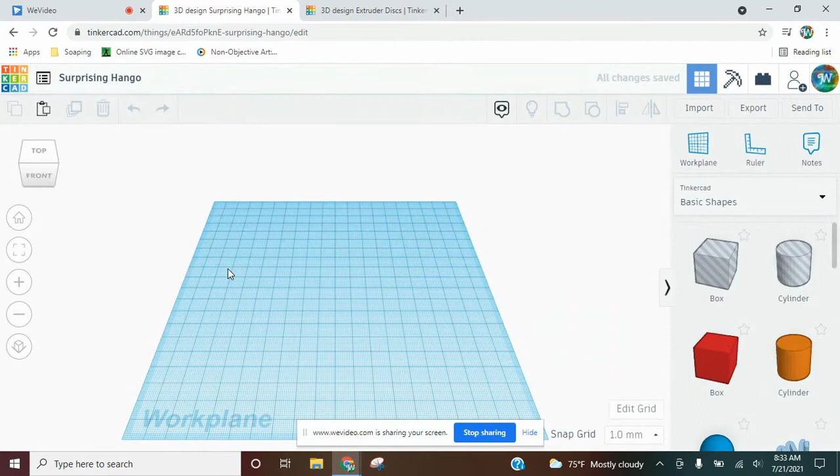A disk is basically a really flat cylinder. So I'm going to click and drag the cylinder over here.

My extruder discs are 18 millimeters in diameter, so I'm going to click and change this to 18.

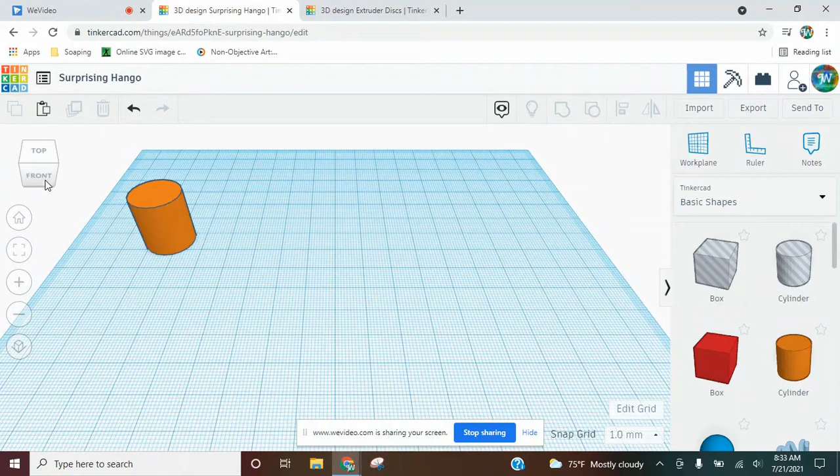I use PETG filament, which seems to be a little bit sturdier than PLA. I don't know if you use PLA if you need to make it a little bit thicker, but my thickness, I know 3 millimeters has been sufficient. So I'm going to change the height to 3.

And then while I've got this pulled up, I'm going to create more sides on it, and it's going to make it just a little bit smoother.

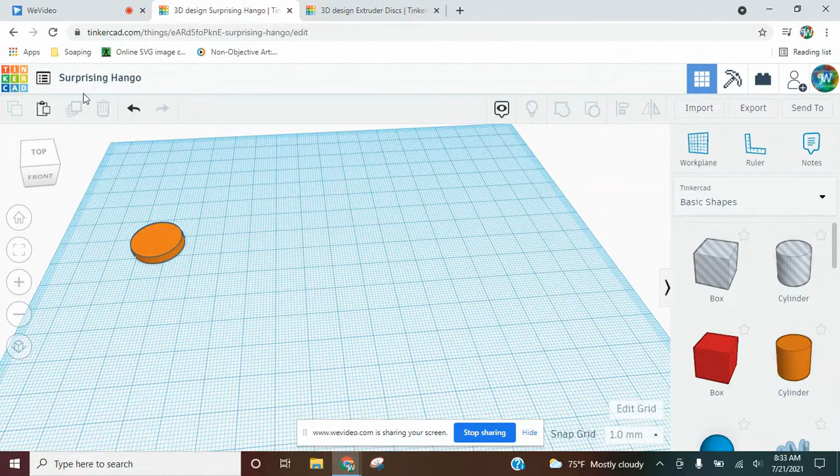Now we need a design, and because Tinkercad gives it these really interesting names, I have a hard time remembering what's what. So I'm going to click here and just change this to extruder disk.

All right, so now that I've got my shape, my extruder disk template, what I need to do is put a hole in here of some shape.

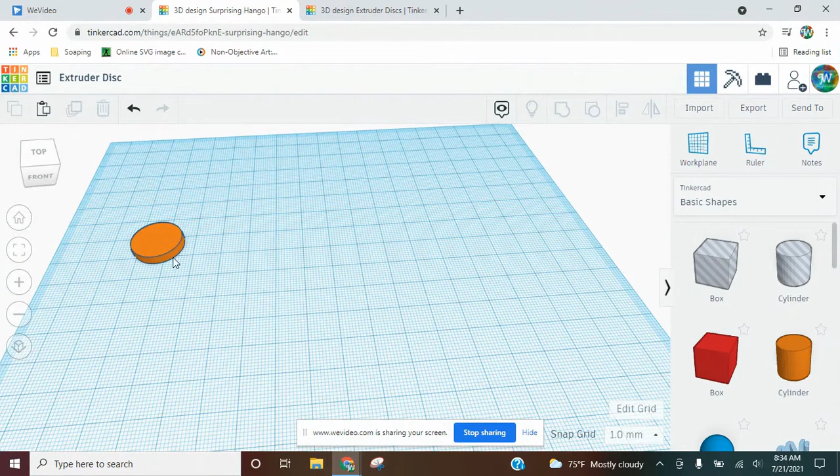Whatever image you decide that you want to put into your extruder disk, you need to make sure you're not violating copyright laws. I don't have tons of information on when it's okay to use what, but I'm going to go pick an icon or picture that I know is going to be okay to use with this.

All right, so what we want is a solid image that we can put into the disk. So my first instinct was to open this with Paint and just fill in the circle.

So when I go here to Paint and I click the paint bucket to fill in the circle, I can see I still have that white outline, which the file is going to pick up, potentially. Sometimes when you convert it, it would make it solid, but I don't know if it's going to.

So I'm going to fix that now. I can choose a shape and just go around it, then change the fill to solid. Then I can fill that in completely.

All right, so I got that done. Let's save it. And my save as options are not going to put it in a format where I can open it in Tinkercad. I have to have an object or STL, I think. I can't remember all of them, but none of these were options to open in Tinkercad.

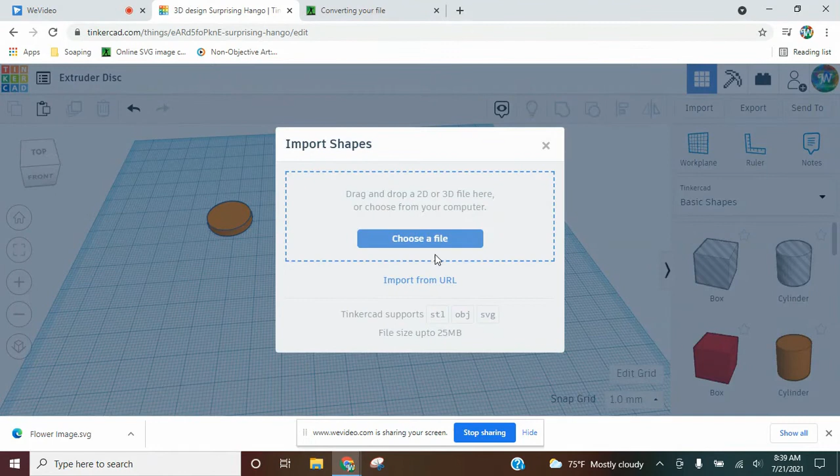All right, so I've got my SVG downloaded, and I can go to Tinkercad and import an image. So if I go to my downloads...

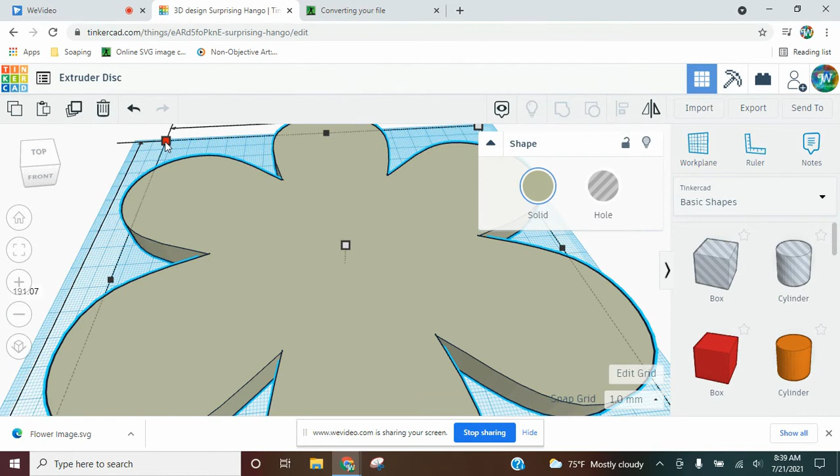When you scale this image down, we want the ratio of the side lengths to stay the same. So we're going to press and hold the Shift key and the corner to make sure that happens, and it preserves the ratio of the side lengths.

If I don't click the Shift key, I can do this and change the ratio of the length and width, but I don't want to do that. So hold the Shift key, hold the corner, click and drag, and now it's going to keep the ratio the same.

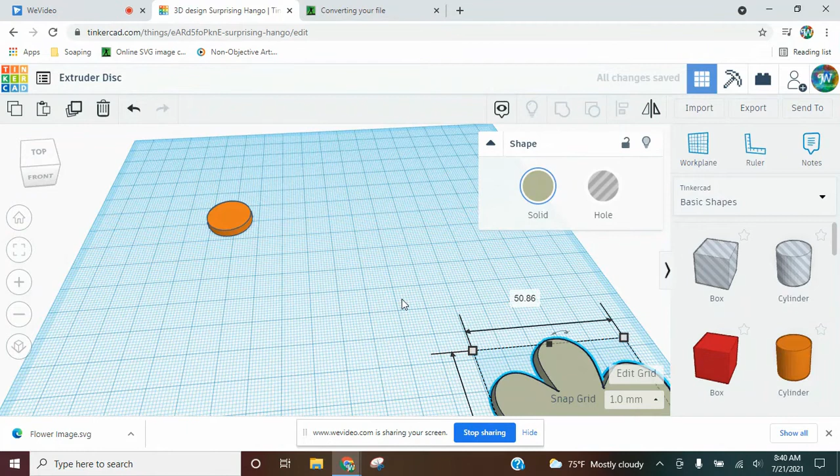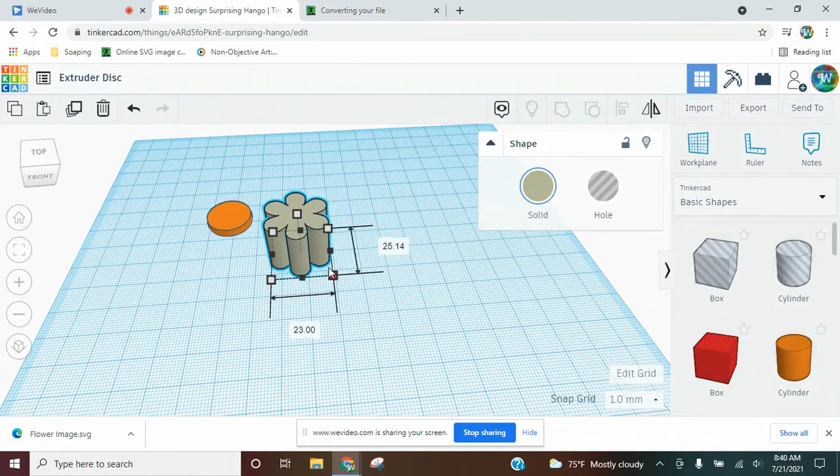I want to make this tall because when I hold the Shift key and shrink it down, it's also shrinking the height. So we need this to be below 18 by a good bit so that I'm not risking running into the sides of the extruder disc. So now I have my little flower image here.

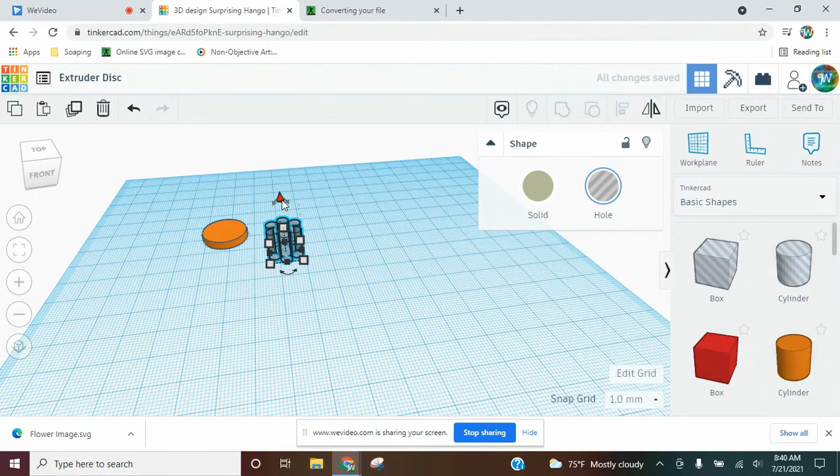Okay, I'm going to click the flower and turn it into a hole by clicking hole. And I always just like to go below the build plate just a little bit. It's not necessary, it just makes me feel better. So if I go down like -2, I know it's going to go all the way through the extruder disc, which it would do anyway, but I just need to feel good about myself, I guess.

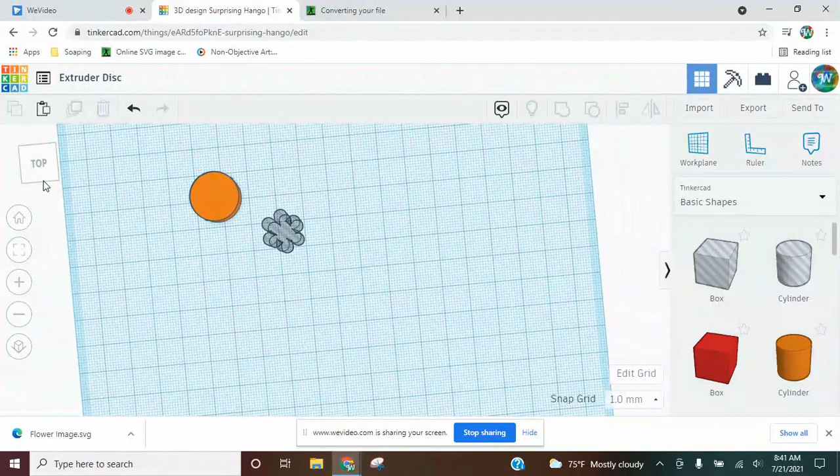So now I want to center this on the extruder disc. I can click and drag to select both pieces, go over here to where it says align, and I'm going to align it, and they are now centered.

And then now that they're centered, I can group them. And I can see that I have this shape in the extruder disc, and I can click it two-dimensionally and see I like the way it looks. It's not too close to the edges, and I think that's a good shape to go with.